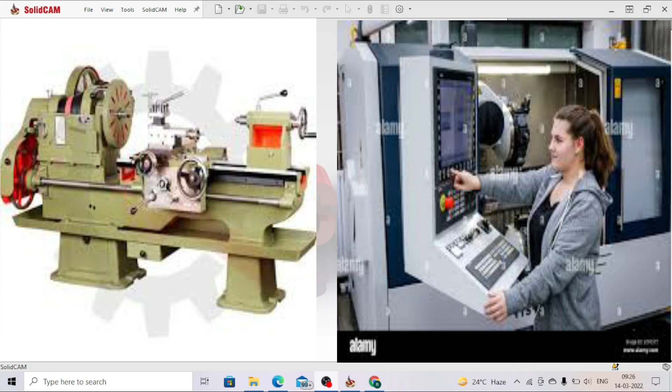It is a new day, yes it is. And on this new day, I ask myself a series of questions like, what would the world become without engineering? What would a world without technology look like? We see the world progressing from lathe machines to CNC machines, from simple cars to driverless cars.

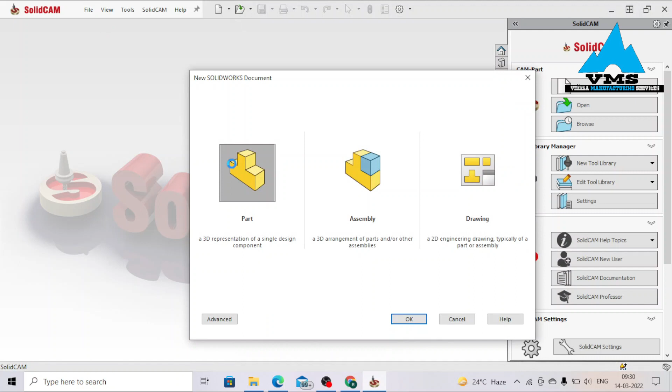So rather than learning the commands, for example, if I come over here, File, New, Part, it's going to take some time to reflect.

Okay, so rather than learning commands like line commands, circle commands, one after the other, we are going to be making use of projects. We are going to learn all these commands through the help of projects. I believe this is more effective than learning the commands separately.

So we are going to start with commands first, with CAD, CAM and CNC. In the future, we are going to complete this particular YouTube channel with computer-aided engineering.

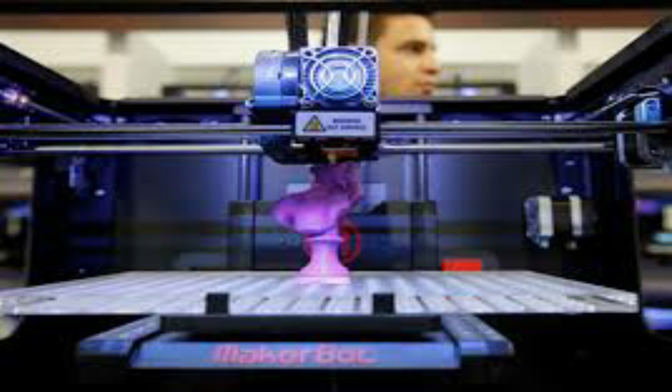I equally intend to introduce 3D printing. So we are going to make about more than 50 projects, more than 50 mechanical designs. We are going to design the project and then generate the M&G code using our CAM software.

So later on, we are going to take the same CAD design and manufacture it with the help of 3D printers. Hopefully, my 3D printer will be set up by that moment.

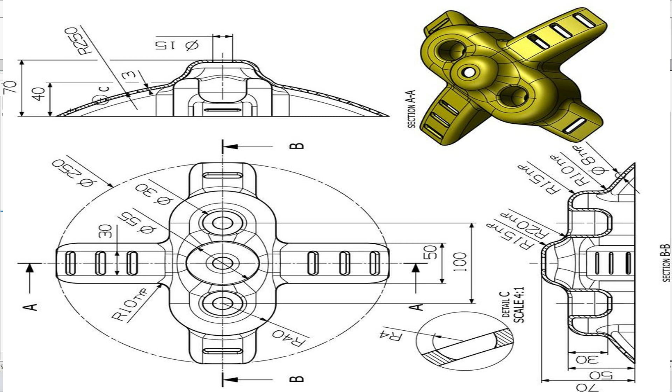So enough of this introduction. With this YouTube channel, you are expected to gain skills towards CAD. In CAD, you will gain skills towards interpretation of engineering diagrams, 3D design skills, assembly skills, and indeed creation of fixtures. As we all know, when working with CNC machines, fixtures are required. You need to hold the working piece together before any operation is done.

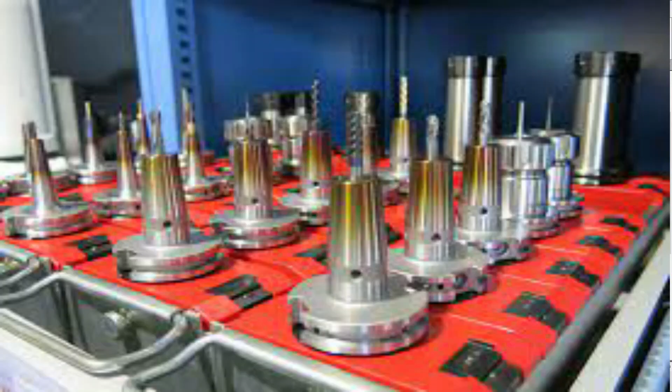With CAM, on the side of CAM, you expect to get skills towards understanding the tools in CNC. You will obtain skills towards generating the M&G code required for the mechanical part, and again, you are going to obtain skills towards troubleshooting of the M&G codes.

Troubleshooting is very important. Now, why do we say troubleshooting? I want to tell you guys that SolidCAM or CAM softwares in particular are not perfect. They do have limitations, so sometimes you need to troubleshoot the M&G codes, you need to troubleshoot your program. So we are going to be using CIMCO Editor for the troubleshooting.

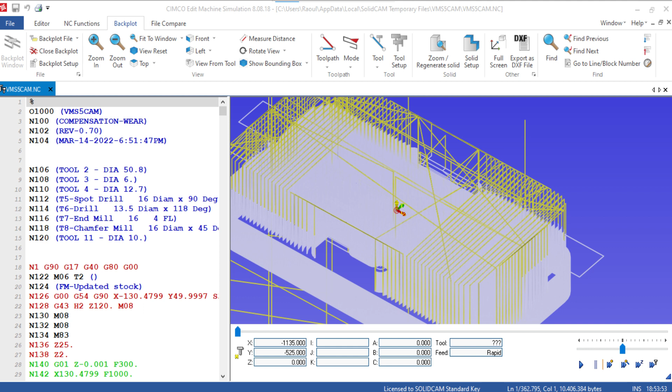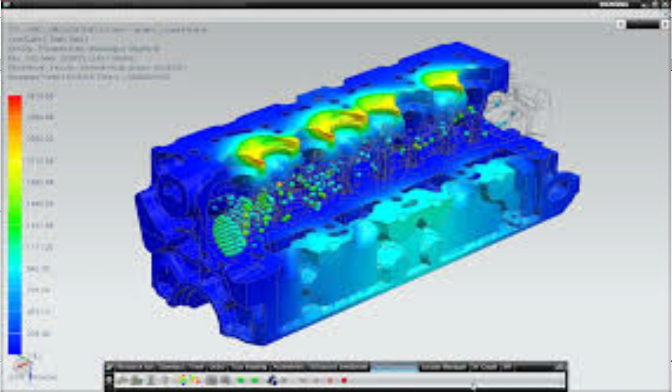Nevertheless, later on we are going to be working with computer-aided engineering, where we are going to analyze some mechanical parts. We are going to be applying some forces and looking at points where the material breaks. We are going to be applying some gravities to the mechanical part and seeing what happens. We are going to be applying some frequencies and seeing where actually the material deforms or fractures.

And at last, we are going to be working on rendering. Rendering is actually a very important process. You can make your project, you make a series of projects, but the presentation matters. The way you present your project matters a lot, whether on your portfolio, on your CV, or whatever. The color or the texture you use matters a lot.

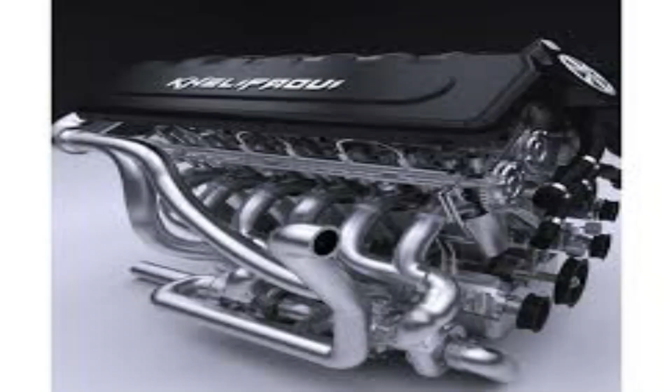We are going to be using SolidWorks Visualize in order to do this, to make our rendering process. It's very important, I'm putting this at the last. This will be the last thing we are going to do. I'm going to select 10 best projects, or you guys are going to select 10 projects of your choice, and we are going to make the rendering with those projects.

To round up, we are going right now to make an introduction about the SolidWorks or SolidCAM interface, and then we are going to look upon SolidCAM settings as the first tutorial. So let's get started. Basically, this is the interface of SolidWorks.

Being it's written here SolidCAM, but it's just that my SolidWorks and my SolidCAM are being embedded together. That is why it looks this way. But nevertheless, if you open your SolidWorks, the interface should look exactly this way.

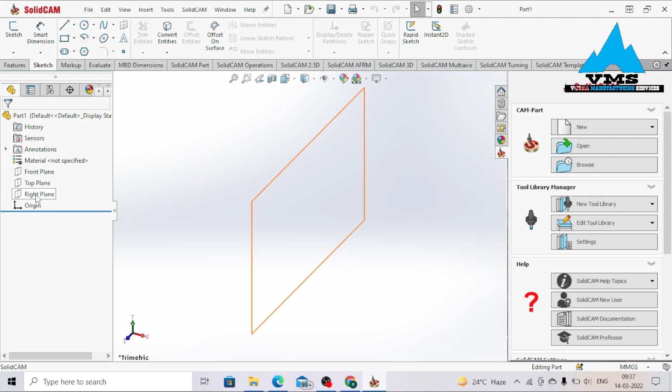Okay, so you are going to see sketch. Basically, we have to start with a sketch. Definitely, we have to select if we are working with the top view, side view, front view, or bottom view. As you can see, front view, top view, right view, even bottom view could be selected. So if I just come over here, sketch, you see you could select the views and even the bottom view. So we are going to go with the commands through the help of projects.

So I just want to make one thing - I just want to close the software and reopen it back. Just a moment.

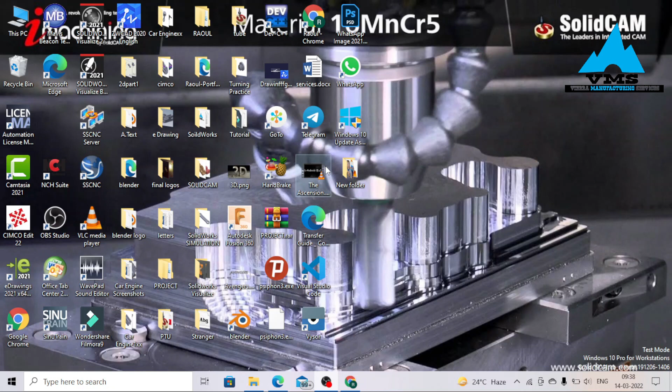So right now I want us to discuss about SolidCAM settings. We need to see what are the settings, what are the options we got when we are using SolidCAM. So it's gonna take some time. Okay, good. So you just come over here, SolidCAM settings.

Okay, so now we have the user directory. The user directory, it's actually a folder where all your CAM projects are going to be saved. This is automatically selected to my document. So you could change it just by coming here, you browse. You could come to, let's say, desktop, make a new file, and then say, okay - let me just a moment, let me renew. You could say, let's say, SolidCAM projects, and you just go for okay. But right now I'm just gonna cancel it - I just like the default my document.

Okay, so we have units. The units are very important. You should make sure that you are either working in metric or inches. When we say metric, we mean millimeters. You need to be aware of the unit you are working with.

Now we have the default CNC controllers. We got many CNC controllers, and it's very important you select the right CNC controller. As default, we have G Milling 3X, but when you are going through the CAM software, you could still select your controller.

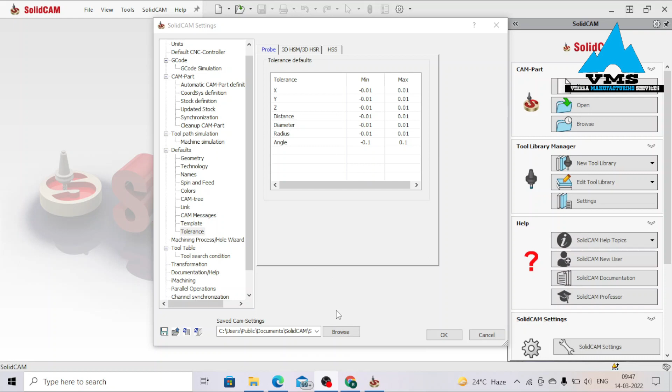So guys, I hope I was able to make you understand the importance of tolerance. Actually, tolerance is highly important. If you see any engineering sheet, let me just show you guys a sample. Okay, let me just view this.

So normally this could be the engineering diagram. They can give you a diagram like this, and you are required to draw the isometric view. It means you have to interpret this into a sketch using your own knowledge. As you can see here, let me just zoom it, please. Just a moment.

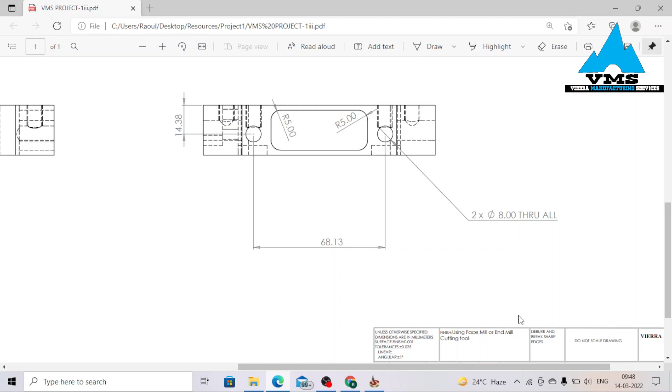Okay, good. So as you can see here, the manufacturer can actually specify the tolerance. You must work within this tolerance. If the hole has to be 40 millimeters, it should be within this tolerance, that is 40.025. If it is 40.026, then the hole is wrong, and he will not buy the product. I don't know if you are understanding my point. You should be within the tolerance.

You don't have to play with tolerance. So to be on the safe side, tolerance goes with the tool. Once you select the right tool and use the right operations, I can assure you guys that the tolerance is going to be beautiful.

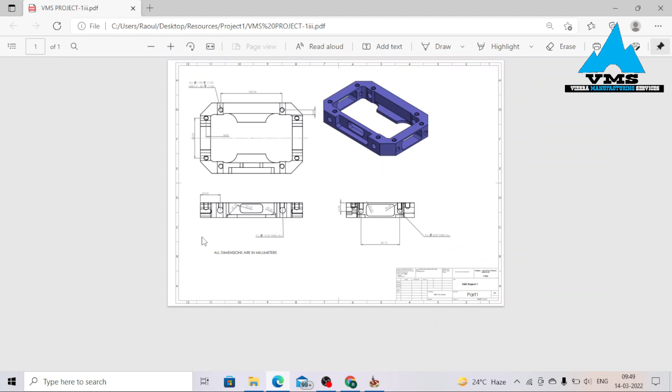Okay, let me just zoom this back. Okay, so we are actually done with SolidCAM settings, the basics at least. In further tutorials, we are going to go through more of these settings as time goes by. So I hope you guys can see my screen, and I hope you guys see this beautiful mechanical part.

So this will be our first project. We have to actually interpret these sketches and draw this particular part with high precision. Okay guys, so this project is known as VMS Project 1. This will be our project 1, and we will begin it in the next tutorial.

So I just want you guys to remember that VMS is aimed at opening the world towards manufacturing.